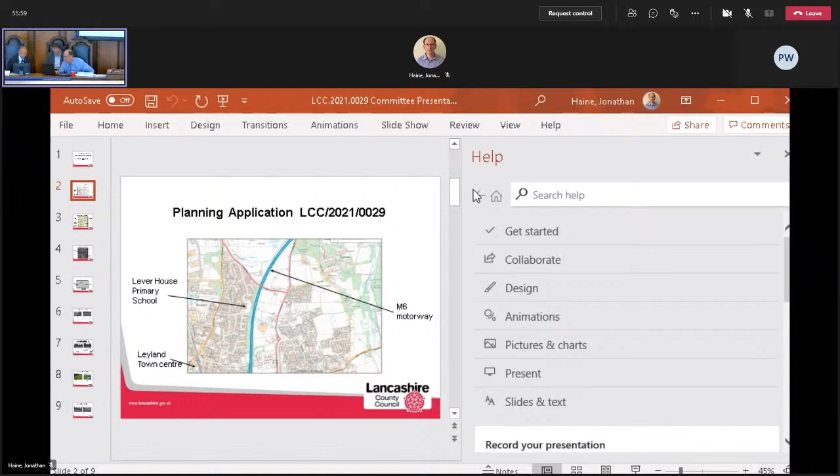In that case, moving on to the new item 6, the old item 7, South Ribble Borough application number LCC 2021-29. It's the creation of a new car park with 2.4 metre high security fencing and gates at Lever House County Primary School, Bristol Avenue, Farington. Jonathan, please can you present that one?

Lever House Primary School is located to the north of Leyland Town Centre, on a site between Bristol Avenue and the M6 motorway. You can see Leyland Town Centre here, the M6 here, with the school located on this site, which includes an area of reasonably large playing fields.

The second slide shows the site in more detail. This application is for a replacement car park for 26 spaces, located on part of the school playing field, to the north, next to Bristol Avenue. The existing school building is located between Bristol Avenue and the playing fields, with the M6 beyond to the east, just off the side of the slide.

You can see the playing fields here, the proposed car park located in this area, and the current car park in this area. What the school wants to do is make a larger area of hard playground, so they wish to convert the current car park to a playground and build a new replacement car park on part of the playing field.

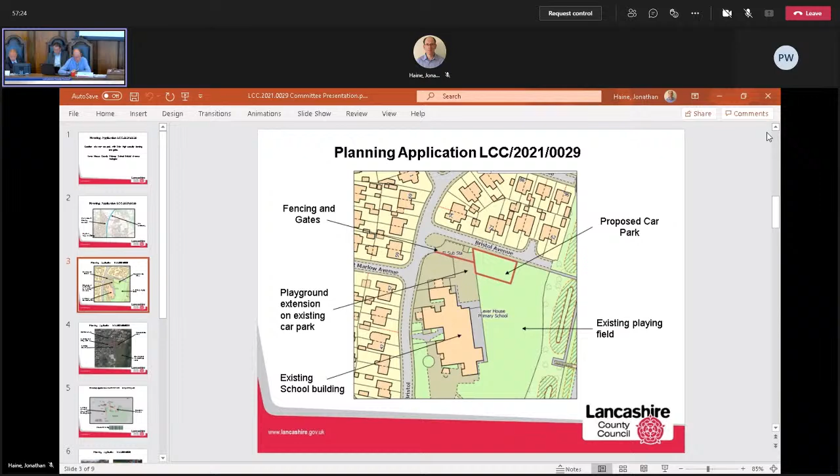Again, you can see the nearest houses on Bristol Avenue to the north. This is the replacement car park here, with an area of fencing, and this is the current car park. What the school wants to do is create a larger area of hard and soft play surface here, which obviously requires replacement car parking.

The school wishes to develop in this area. You can see the school buildings here — this is quite a substantial primary school, with a maximum capacity of about 315 pupils. Again here you can see Bristol Avenue with the houses located down the side of the road.

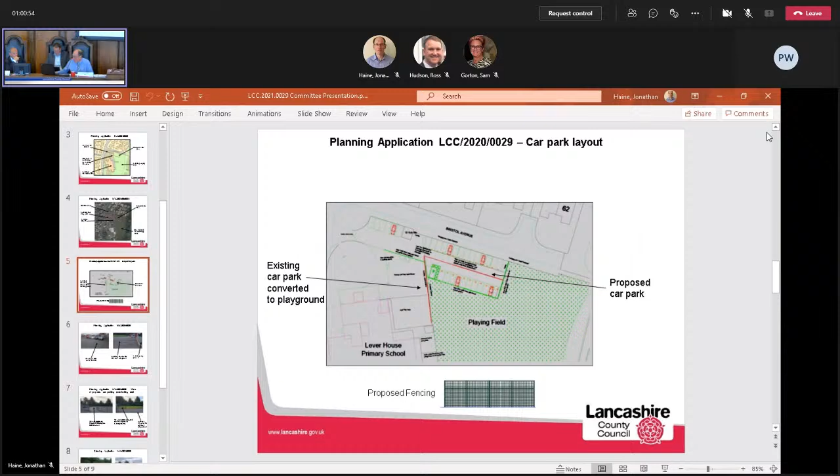It can be seen that the proposed car park is at the top corner of the playing field. So I'll just jump back to the earlier slide. Top corner of the playing field, and therefore the impacts on the existing playing field have been minimised. It appears that there will still be room to accommodate a number of marked out sports facilities on the field.

Also, there will be some loss of playing field, and therefore conflict with paragraph 99 of the National Planning Policy Framework. On balance, it's considered that the benefits of the proposal outweigh any conflict with the policy.

The existing landscape along the northern boundary site will be retained, and therefore the impacts on the houses to the north on Bristol Avenue would be acceptable. So you can see there, just on the slide, you can see the houses here, and there is some landscaping comprised of a hedge and trees that will be retained, so there will be adequate landscaping for these properties.

You will see that we have received one objection from a local resident who is concerned about parking and traffic issues. However, the issues raised by the resident are beyond the scope of this application, and the car park aims to ensure that existing levels of staff parking are maintained, so issues of on-street parking are not exacerbated.

Therefore, on balance, it's considered that this proposal should be supported, subject to the conditions set out in the report. However, due to the conflict with the playing fields policy of Sport England, it will be necessary to refer the application to the Secretary of State.

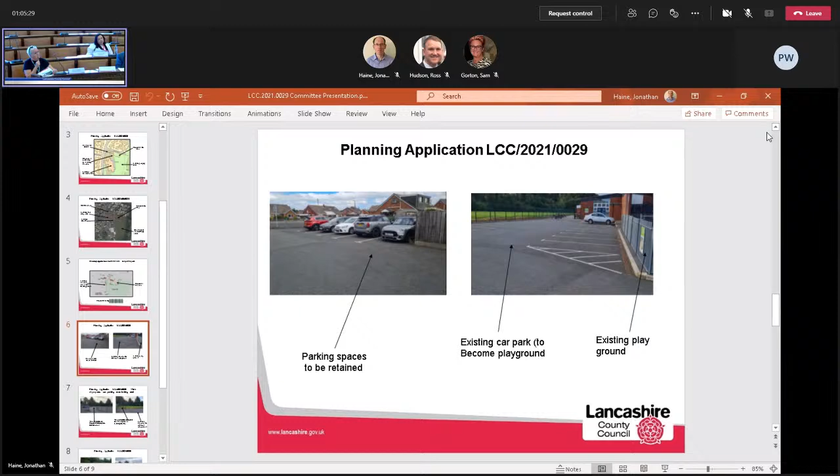Thank you, Councillor Potter. If you go two slides down from that one - thank you, that one, yeah. I actually have very little problem with this proposal because I think they are replacing what they are losing.

One thing, I want to make sure I understand Sport England's objections. Given that you're getting a new play area that will allow newer sports like basketball to be provisioned in the future - the picture on the left, I don't know this area, but it doesn't look like a particularly vital patch of playground. Is there anything I'm missing? Is there a track coming through, a football pitch there, anything like that? It just seems to be the corner. So for me there doesn't seem to be much loss of amenity on this application. Could you confirm that please?

Yes. What they're seeking to ensure is that grass pitches are safeguarded, because Sport England's policy is that grass pitches provide the maximum amount of flexibility in terms of being able to be used for a variety of sporting uses - marked out for football, athletics tracks, or any number of different sporting activities, and that's what they're concerned to safeguard.

What they're saying is that while the playground space would provide play area for primary school kids, it's not marked out in any way for any formal sport, and therefore the conversion of part of the playing field to car park is not being addressed by any similar improvement in sporting facilities at the school. If, say, the school were seeking to build a MUGA on the car park that could be used for different sporting uses, then Sport England may reach a different conclusion. But because the play area is just being used for general play, you haven't got that sort of replacement in sporting use of the site. So that's the basis on which they object to the application.

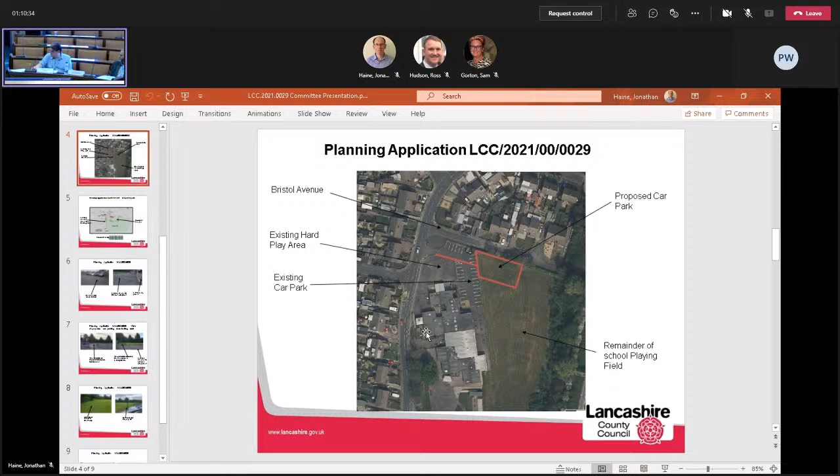Are you, Councillor Murphy, satisfied that the existing signage should be adequate? No? As a vociferous campaigner on road safety issues, discussing this with close colleagues, my friend Dave, who calls himself the Officer for the Bleeding Obvious, made the point to me last night that we need to really improve signage for car parking in front of and on school car parks going forward. I'll continue to make that point.

Councillor Murphy, sorry to interrupt. I'm sure we're all absolutely as keen on road safety as you are. The only thing is, on this particular point, are we aware there is actually an issue here?

Councillor Murphy, are you satisfied? I feel the view of the committee seems to be against me. The room appears to be against me. I'm afraid on this occasion it might be.

Kerry, thank you, Chair. Of course, Councillor, if you want to propose the extra condition, you can, and it will need to be seconded in the same way the proposal has just been before us. So if you want to do that, you can put it on the table now before we move to the vote. The only caveat, as Jonathan said, is that the existing entrance isn't part of the planning permission here, so we'd have to be very careful about what you put in, but if you want to put that forward, we can.

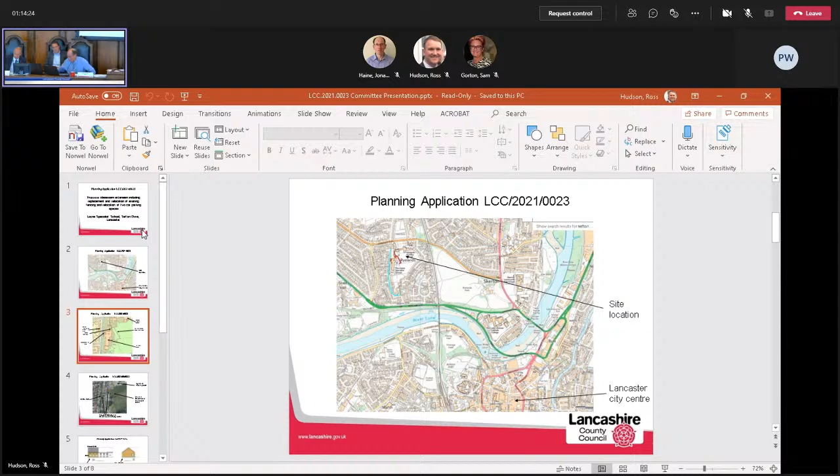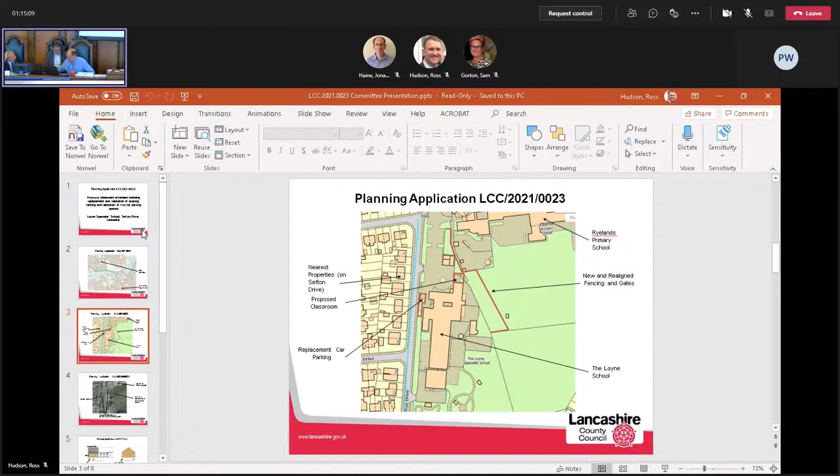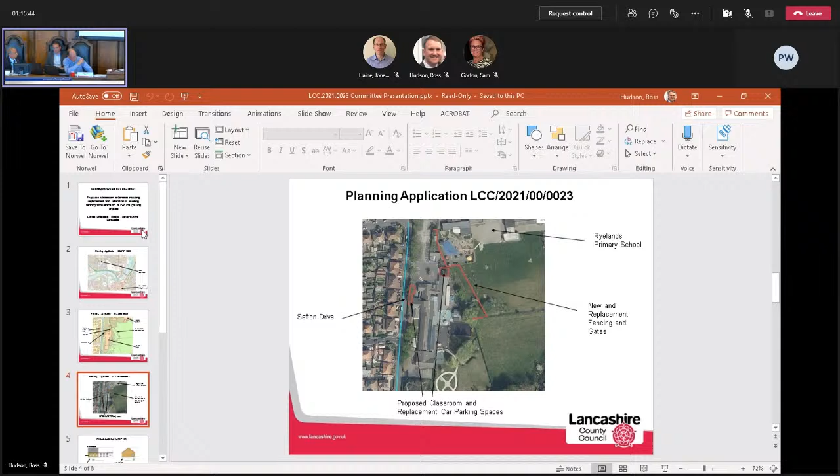This building is required due to increased demand for places at the school. The school caters for pupils with special needs.

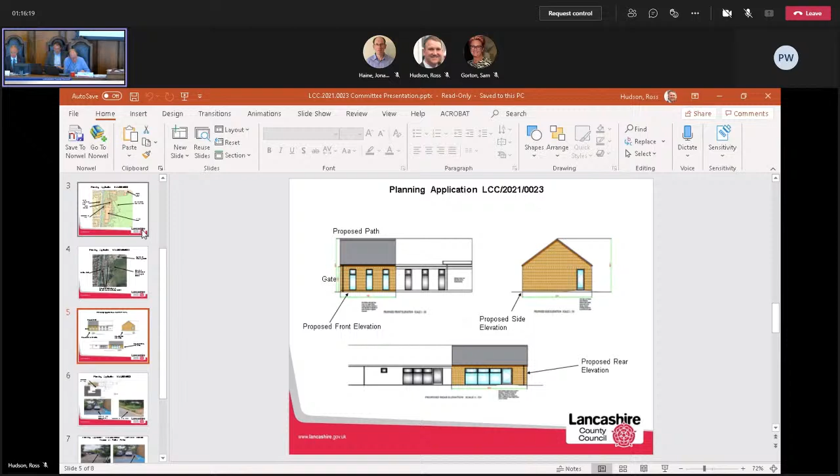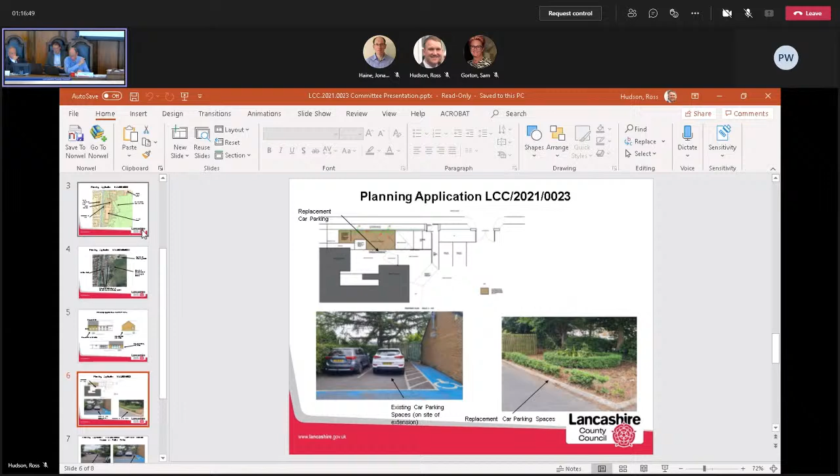The new building also requires the relocation of existing boundary fencing. The fence will be moved further to the east, taking in part of the playing field belonging to Ryelands Primary School, but the design and fencing will be an improvement on the existing palisade fencing.

Just to conclude, paragraph 95 of the National Planning Policy Framework states it's important there is sufficient choice of school places to meet the needs of communities, and this development would meet this aim. The extension is small scale and will be of acceptable visual appearance.

The application is brought before you due to an objection from a resident concerned about traffic and parking issues. Whilst the extension might lead to a small increase in pupil numbers, the majority of pupils, as this is a special school, are transported by bus, so a significant increase in traffic is not expected. The application should therefore be supported, subject to the conditions set out in the report.